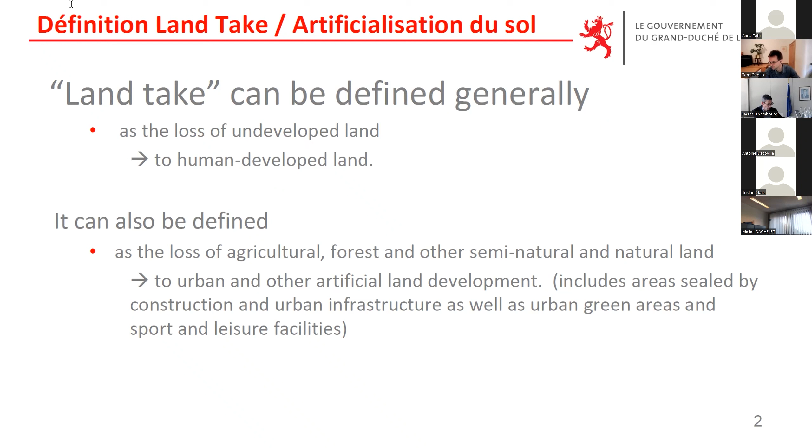Now, I suggest to skim over the definition of land take, artificialisation du sol, as our previous speakers have already provided us with definitions that seem to me to be most appropriate. I'd just like to recall that the focus should really be about the land take, and the no-net land take aims at concentrating and allowing buildings on already built sites and areas.

I'd like to focus now on Luxembourg and Luxembourg's specificity. Compared with other European countries, Luxembourg's growth has been extremely significant on extremely constrained territory. For those of you who've been to Luxembourg, you know that the growth of Luxembourg is similar to some of the metropolitan regions, and I'll show you how the growth is spread throughout and impacts the whole of Luxembourg.

We don't have any quiet areas like in some regions in France, so it is therefore very difficult for us to meet no net land take objectives compared to other countries, as a result of this overwhelming growth.

So growth is everywhere across Luxembourg territory, and this growth poses a number of issues in terms of infrastructures, in terms of water and facilities, in terms of schools, and very often we've reached the limits of capacities.

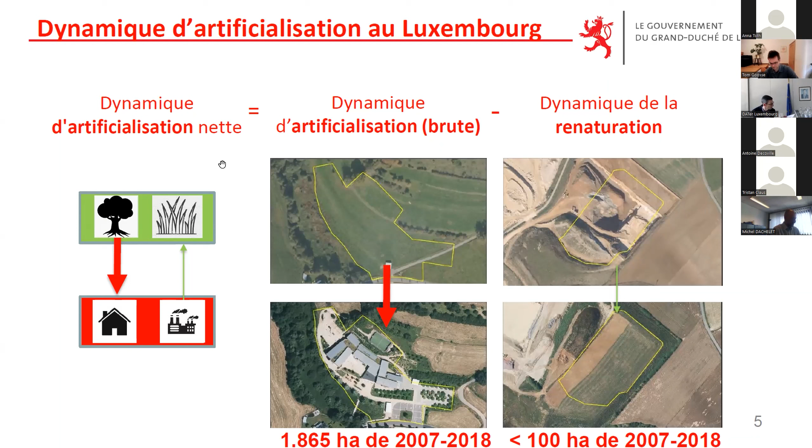And if we compare figures from the period 2007-2018, we have 1,865 hectares of gross net land take as consumed, and under 100 hectares throughout the same period that has been given back to nature, so renatured.

And for this, this is the surface area for urban and transport area, so 1,800 hectares, that's 0.46 hectares per day for land take, which can be rounded up to 0.5 hectares per day. And the land take dynamic of the soils depends on agricultural surfaces, forests, and natural areas.

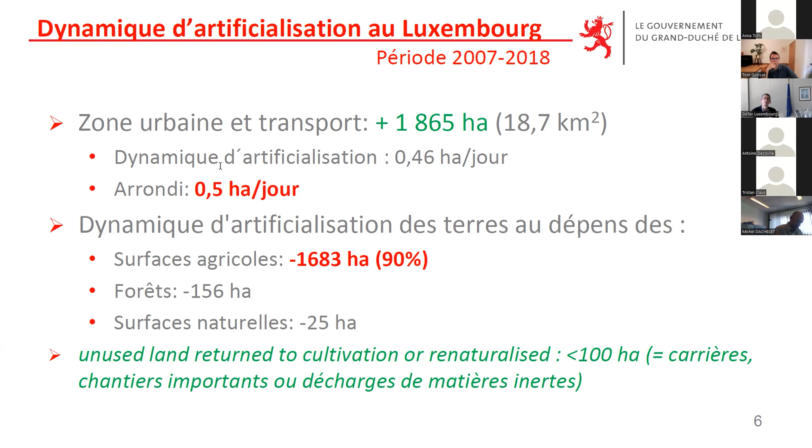So with minus 1,600 hectares for agricultural surfaces, but quarries are significant. The unused land returned to cultivation or renaturalized is on a temporary basis, in the example of quarries.

Now, as in this example, on the left-hand side you have a map of Luxembourg on the land, reflecting the land take, which is really distributed across the whole of the country. North-south, south of the country, the dynamic is a bit more significant. We can see the north and eastern part, even rural areas, really deeply impacted as well.

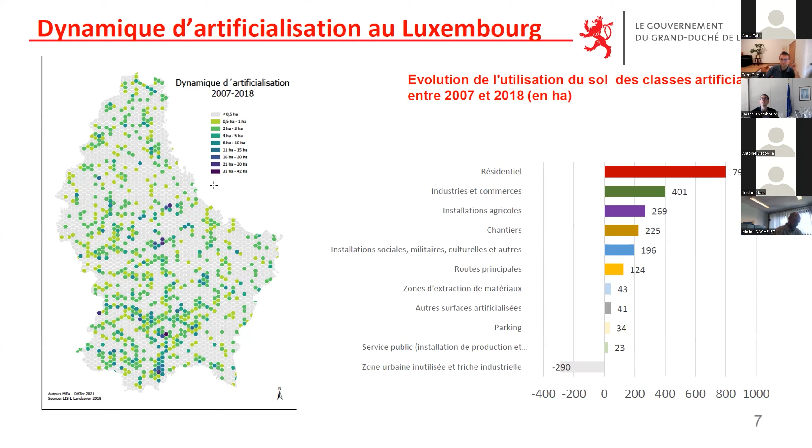And on the right-hand side, you can see that the land take is first and foremost for the purpose of residential housing, as well as the retail industries. So this growth is extremely linked to the economic development of the country.

In Luxembourg, our major issue, as has been described earlier for the Flemish area, we do have a similar issue in Luxembourg, and this is about the number of areas reserved, earmarked for municipalities and for the state at state level. So in fact, we're talking about lands that have been allocated to buildings, so economic activity areas as well as housing areas, which in Luxembourg, the potential is still significant, and this is for the coming years as well.

Before deep diving into these areas deemed as designation of land and property, it is very much protected, which means that the reclassification into non-building areas, non-building land, is extremely difficult. So lands that have been earmarked require significant compensation, and neither the municipalities nor the state can provide compensations as required, because these requirements are very, very high.

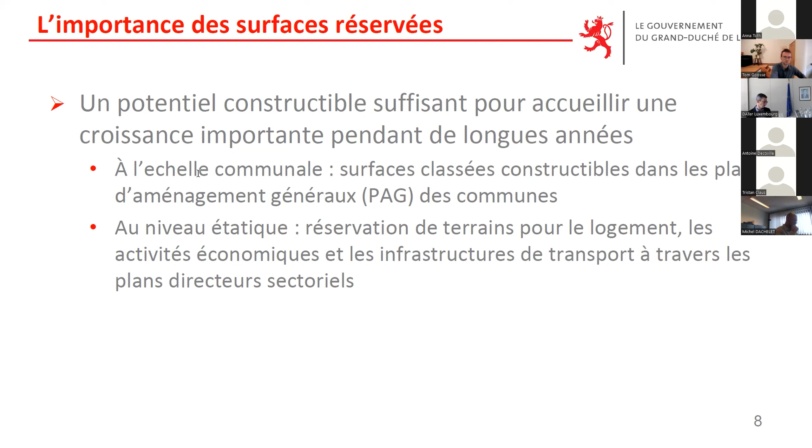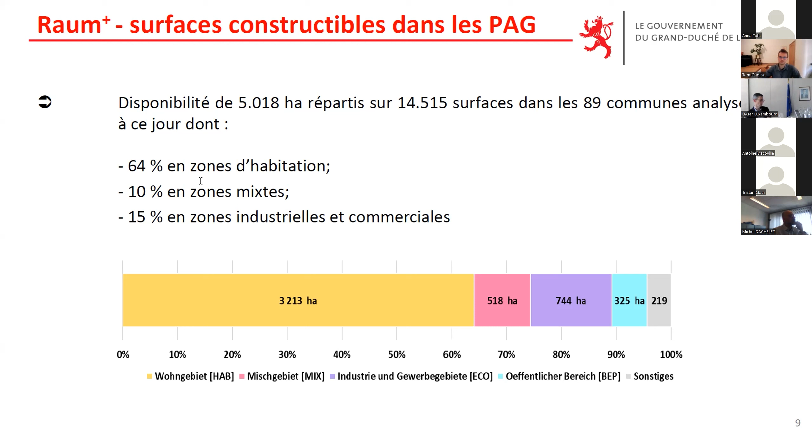In Luxembourg, we've developed a tool referred to as Raum Plus, identifying the buildable areas on the local municipality master plans and within the general master plans, focusing on buildable areas. And here in this one, we have noted an availability of over 5,000 hectares, spread across 14,515 surface areas within 89 municipalities: 64% in housing areas, 10% in mixed areas, so housing and commercial activities, and 15% spread in industrial and commercial areas.

So these reserves, if we looked at them more closely, we realized that we have availability in areas suitable for building of 442,000 housing units, so potential to accommodate 325,000 new inhabitants in Luxembourg, which is a growth that would allow us to accommodate populations for the next 26 years.

And the problem in Luxembourg is that most of this real estate potential is not located in the areas we'd like to develop, so in urban areas, but quite the opposite, in municipalities we'd refer to as endogenous, where development should be moderated.

And when we look at these more closely, we realize the potential of real estate reserves will allow us to meet demands for the next 70 years.

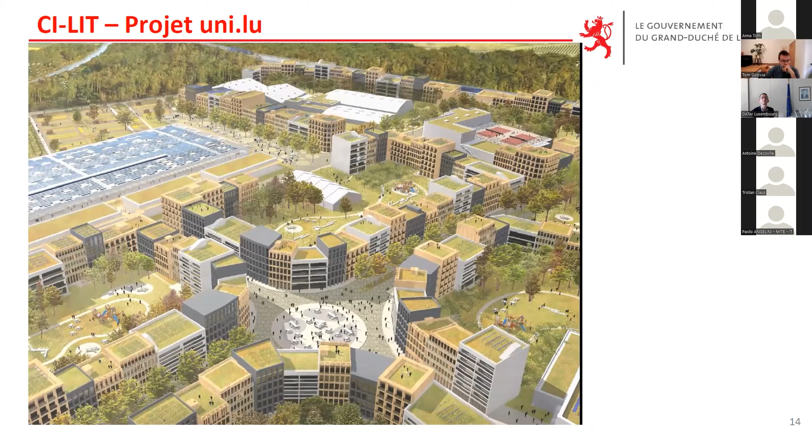So we'll start with the University of Luxembourg, which has undertaken a project where they propose the transformation of a big commercial area, as you may see in the photograph. Their idea was to have an urban area for people, not for cars, so a reuse of the surface area for human beings. This is what they propose after having removed the cars, densified, and made the area multifunctional.

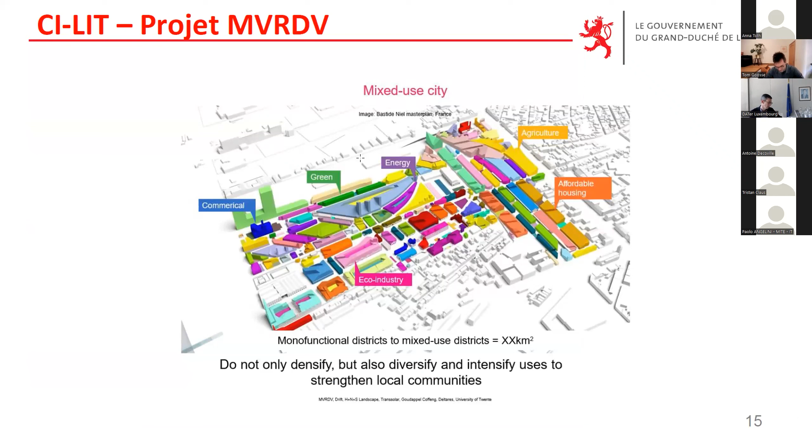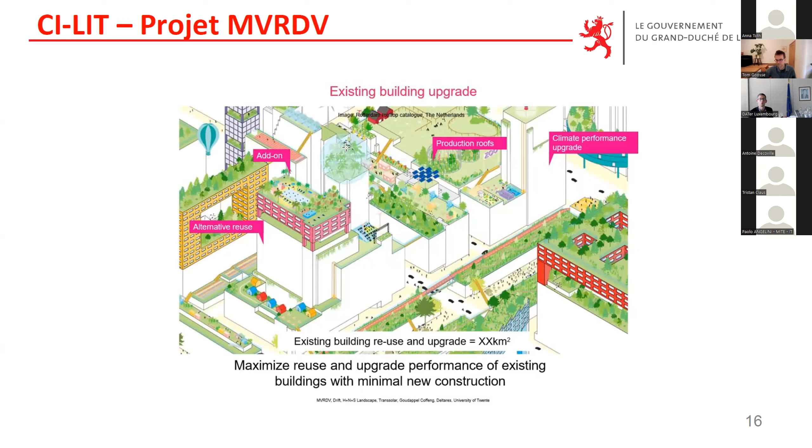There's the MVRDV project, which doesn't only insist on densification but also on diversification of different districts to strengthen local communities. They recommend the reuse of surfaces, the upgrade of performance through reuse of surfaces, putting additional stories, and using roofs for other functions.

The team AREP produced a scenario based on zero land take, which imposes that all new buildings be made on already taken land. So they go even further than no net land take. They talk about reinvesting or reusing the existing building legacy.

For example, a household of four people, once children leave, may settle down in a smaller dwelling. There are different scenarios that make it possible to intensify densification.

And the 2001 team proposed a very interesting tool that would allow us to solve one of the major problems in Luxembourg: the blocking of building potential outside of building areas, through an instrument they've called TDR, Transfer of Development Rights. The idea is to have development rights granted from outside the urban area to the inside, releasing from urban pressure land that has not been taken yet, and intensifying densification.

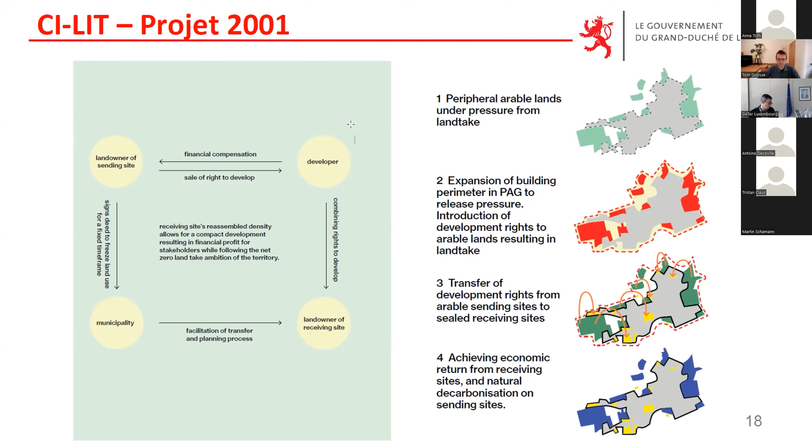So let me get back to the Luxembourg background and the issues we've got in implementing no net land take in Luxembourg. These limits are in the hands of sectoral policies and communal land use planning, because of the areas booked by different sectorial policies, and there's the issue of the autonomy of municipalities and the protection of ownership rights. That's very difficult to avoid.

And just like Antoine Decoville said, it is important to implement an intersectorial approach, so that all different sectors work hand in hand to allow for the implementation of no net land take.

So what we are proposing to do in the framework of the master program, which is a political instrument, is to have two different time periods: the first until 2035, and the other 2050, where we would aim at land take of 0.25 hectares a day instead of 0.46 today, and after 2050 to aim at 0 hectares a day. So a reduction of land take to be implemented as from now.